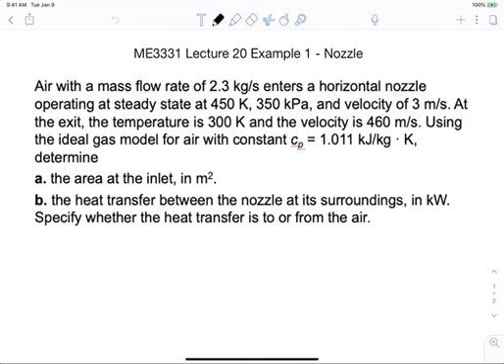The way I'm going to work this is I'll have the slides up like this, and I'll also have a tablet here where I can do examples as we've been doing before. So this should work out pretty well - I have this tablet where I can write the example problems, which you'll see. Okay, so that's the format that's going to happen.

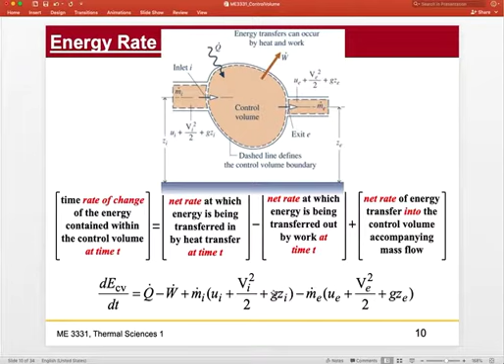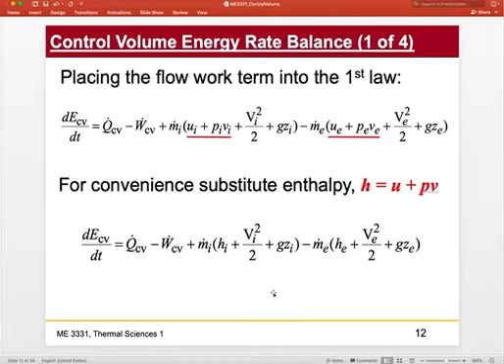So then what we did was develop the work, the flow work at the inlet and the outlet, and use this convenience factor called enthalpy. With that convenience factor, we were able to reduce the first law equation, the unsteady control volume version, into something pretty manageable, and we got this equation here, accounting for both the kinetic energy terms and the potential energy terms.

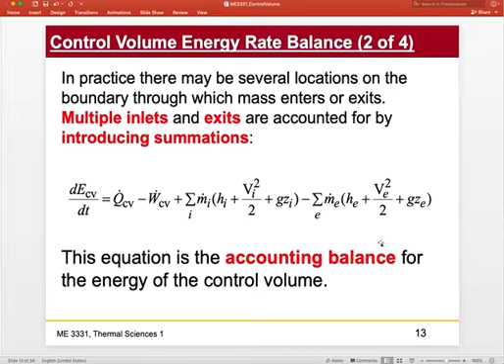Now if we look at the control volume energy rate balance for a steady state system, that is a system in which the control volume energy doesn't change with time. What we call steady state is most of what we deal with in thermodynamics. Most of the things we do in this class are going to be steady state control volume problems where dE_cv/dt equals 0.

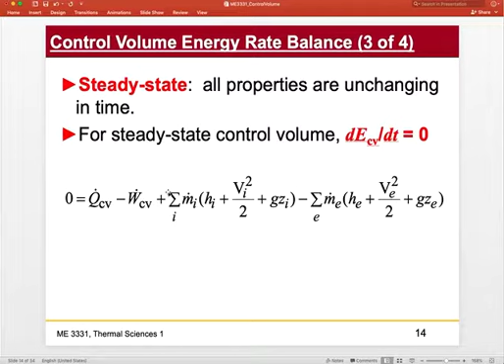In this case, we have the following equation that we've developed and did a couple example problems for. Then if we go to one inlet and one exit, we can get rid of the summations and go from there, reducing this to another form that you see here.

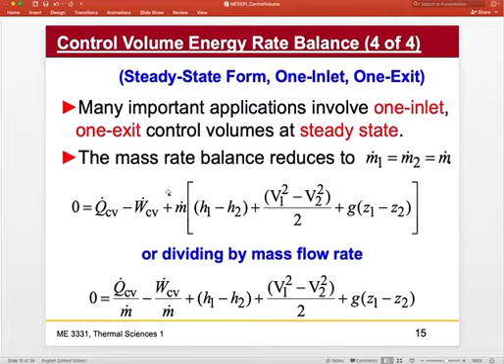So this is where we left off before the spring break, before this whole thing happened and before I had to start teaching this remotely. Hopefully we can get through this and really get to the end of this class in good shape.

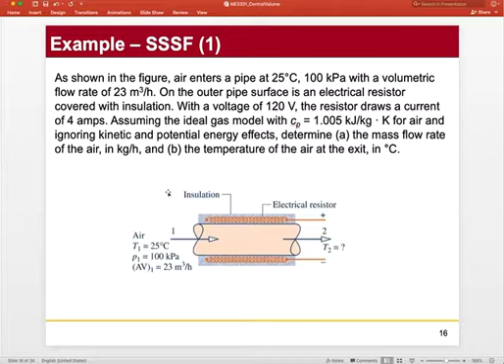Remember we did this one where we had air in a pipe. This was a really simple example. The solutions to this one are posted on Canvas, and hopefully you've looked at these and done some homework with regards to these. Also, we did this tube one here, with two-phase flow, and you did some homework problems that have to do with this.

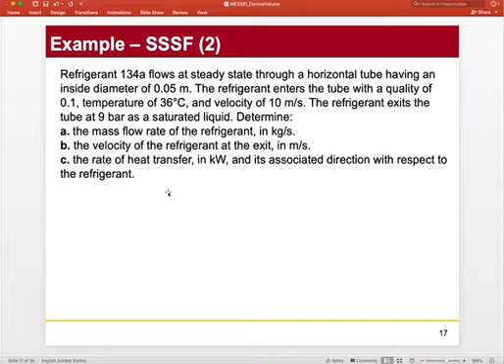That's good. Okay, so now let's move on. Now we're talking about different kinds of steady state systems that we can analyze using the control volume method. Here we have one of these types of systems, and I've mentioned this already before, and I'm going to go through it again, because you probably have forgotten or you weren't here on the Friday before the spring break.

So what we're talking about here is what's called a nozzle, which has a bigger area that goes down to a smaller area, or a diffuser, which happens the opposite way. A nozzle is a flow passage of varying cross-sectional area in which the velocity of the gas or liquid increases in the direction of flow, and the diffuser is the opposite, where the velocity of a gas or liquid decreases in the direction of flow.

So V2 is less than V1, P2 is greater than P1.

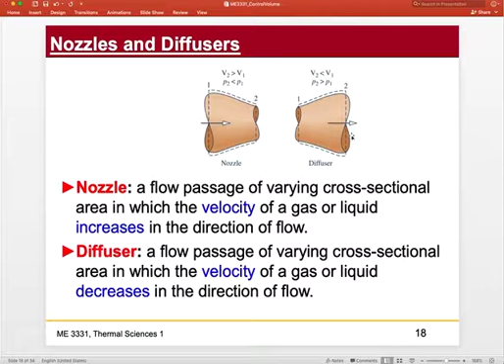Okay, so the nozzle is a pretty simple example. If we look at the nozzle and how to model it, we take the full first law equation, and we generally assume for a nozzle that the heat transfer is 0, so nozzles are generally adiabatic unless I tell you otherwise. We also assume the work is 0 because there's no shaft or propellers or anything like that. And the change in gravitational or potential energy is generally 0, so we don't worry about that. Of course, you're not really going to have a case where the elevation difference between the inlet and outlet of a nozzle or diffuser is significant.

So we're going to cancel that one out, but velocities we got to keep. If the change in potential energy from inlet to outlet is negligible, we assume that drops out, the Z1 minus Z2 drops out, and the heat transfer to the surroundings is negligible, so QCV drops out. You end up with the following equation: 0, meaning steady state, dECV/dt equals 0, equals h1 minus h2 plus the change in the square of velocities over 2, taking into account the kinetic energy effect.

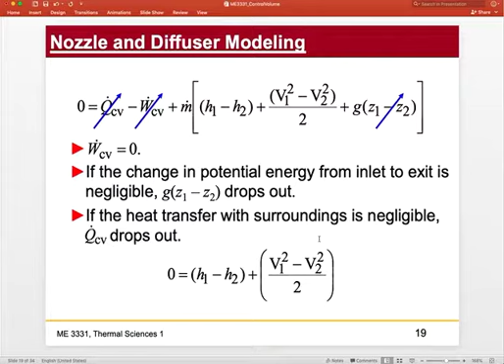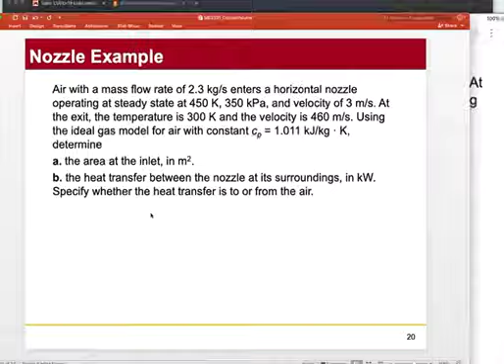So if you want to do an example, we can do a simple example of this kind of problem. Let's do this example together. I noticed everybody liked that my lectures had lots of examples, so I'm going to continue that in the online format, and I'm going to do that all via a tablet. I have a tablet here in front of me that has all this fancy stuff, and I'm still trying to figure out how to use it because I just bought it.

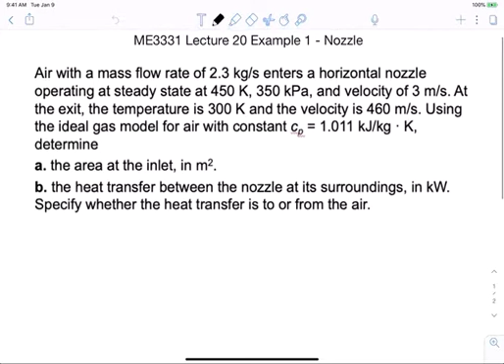Essentially what I've got here is this example problem. I'll be posting this as a PDF online on Canvas. Let's go through this example. Air with a mass flow rate of 2.3 kilograms per second enters a horizontal nozzle operating at steady state at 450 K, 350 kPa, and a velocity of 3 meters per second. So we have air, so we assume this is an ideal gas. At the exit, the temperature is 300 K and the velocity is 460 meters per second. Using the ideal gas model for air with Cp equals 1.011 kilojoules per kilogram K. Remember, we were going to use Cp dt equals delta H, and we can do that here since we say there's a constant Cp. So with this, we're going to try to figure out what's the area at the inlet in meters squared, and the heat transfer between the nozzle and its surroundings in kilowatts. So these are the things we have to find.

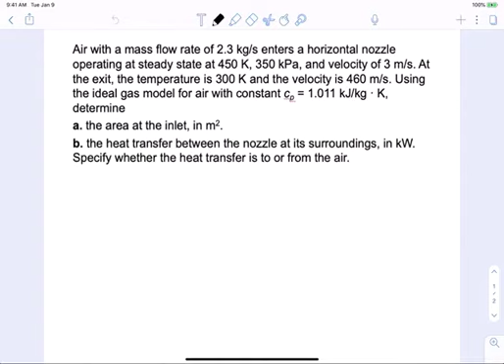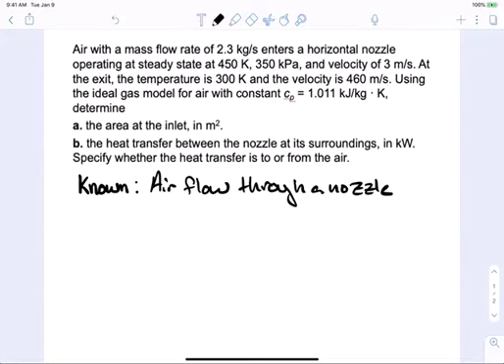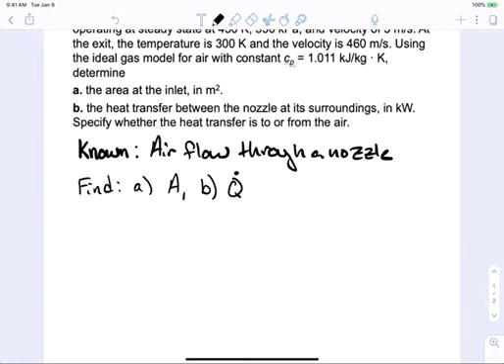As we usually do with these kinds of problems, we have to write down the known. I'll try to keep my handwriting neat here so it doesn't get messed up: airflow through a nozzle. Okay, that's what we know. What we have to find in this case is A, so A1, and B, the heat transfer between the nozzle and the surroundings. Remember how I said normally a nozzle is adiabatic? In this case, it's not, so we need the Q dot from the nozzle, from the control volume. That's what we're going to find here. Now that's the find, so now we have to draw a diagram. Let's make a diagram.

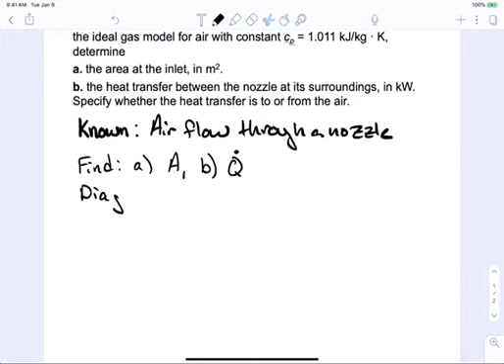So a diagram of our system looks like this. We're going to have a nozzle. Air with a mass flow rate of 2.3 enters a horizontal nozzle. The nozzle means the area is bigger and then it goes smaller. So we have a nozzle that looks like this, and then the area is smaller. It's not concentric, but that's okay.

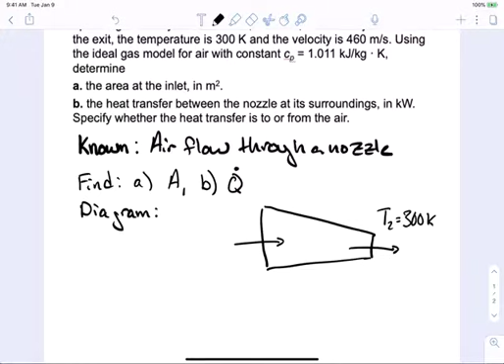I'm still learning how to write with this thing. So we have some flow rate coming out here, and some flow rate going in here. We have T2 equals 300. We have V2 equal to 460 meters per second. Okay, so that's pretty high velocity.

All right, so we're not adiabatic. We have to define our thermodynamic system, of course. We're going to make a dotted line around this thing. We have no work, but we definitely have a Q dot term coming out of this thing. We'll show Q dot as going in, so let me get rid of this arrow and put it in like that. You just assume Q dot is going in, and we'll find it to be negative in the problem. This is 2, this is 1, and we were given a bunch of stuff.

So T1 is equal to 450K. We're given P1 is equal to 350 kPa. We're given V1 equals 3 meters per second. And we're going to say CP is going to be constant at 1.011 kilojoules per kilogram K. Mass flow 1 is equal to 2.3 kilograms per second.

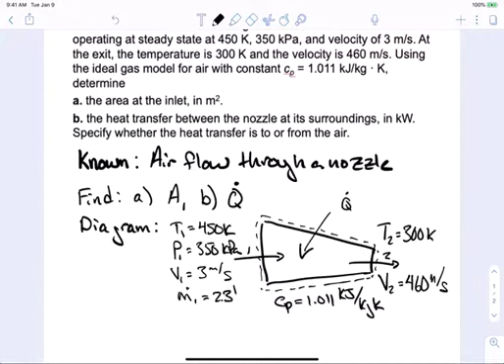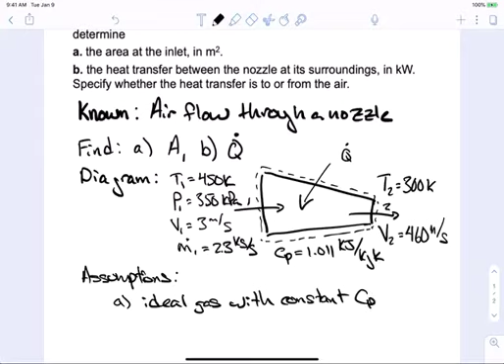Okay, so it's ideal gas, so let's make some assumptions here. Some assumptions we need to make for our problem are that we have ideal gas with constant specific heat. B, let's assume there's no work of the control volume, equals 0. There's no shaft work. It's not adiabatic, and essentially delta PE is equal to 0, so there's no potential energy change. And then of course we have to assume it's a steady state problem. Okay, so it's steady state.

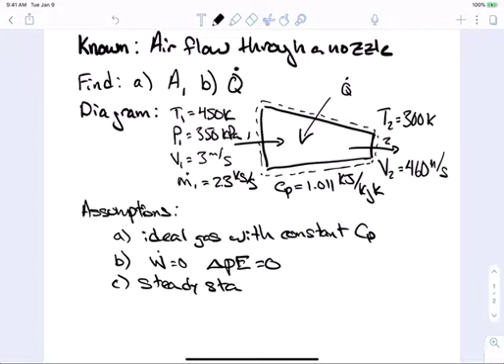Fine, all right, now let's go on with the analysis. So in the analysis, we're going to assume that m dot 1 equals m dot 2 equals m dot, because there's only one inlet and one outlet. So that's the first thing we have to assume here. And that m dot is equal to A1 V1 over the specific volume at 1. So that's something we have to also assume here.

And we can figure this out because we know what the specific volume at 1 essentially is from the ideal gas law: R T1 over P1. So by the ideal gas law, we can substitute this in and get what we need for A1. A1 is one of the things we needed to find. So A1 is equal to m dot R T1 over velocity 1 times P1. This is velocity. Okay, so this is going to be pretty straightforward to do.

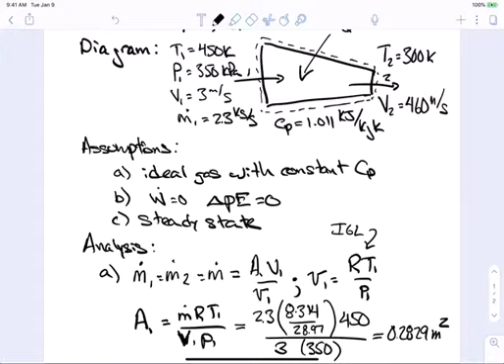So that's a pretty simple thing. We don't need to use the first law for that. Now for the second part of the problem, we need to use the first law. So let's do that on the next page. Example 1 continued.

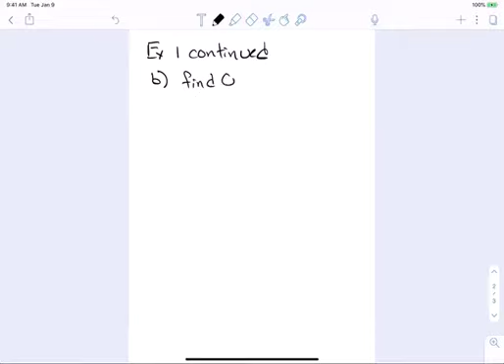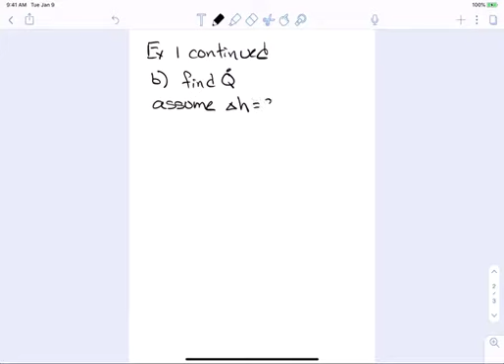Okay, so the next part is that we need to find Q dot. So here we assume that this delta H that we have is equal to CP delta T, because this is a constant. If I said that we don't have constant specific heats, then you wouldn't be able to do this, okay? But since we said this is a constant, that's cool.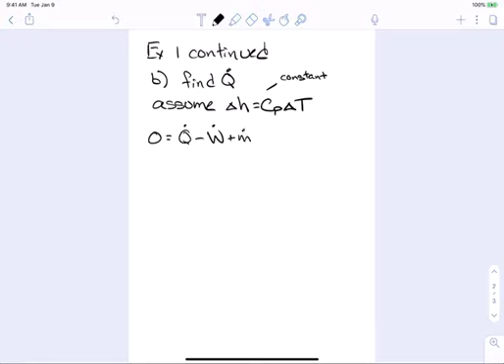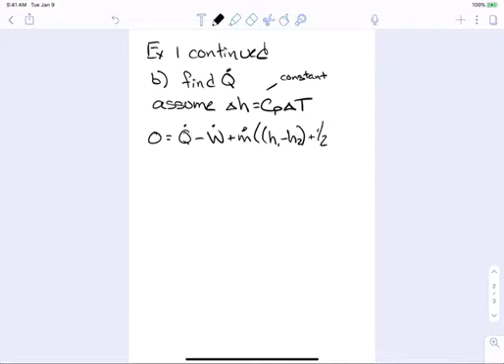So now let's go with here. So we have one inlet and one outlet, and now we can simplify this thing. So 0 is equal to Q minus W. We're going to just put all the terms in here just so we can cross them out for fun. M dot, H1 minus H2, plus 1/2, let's zoom up on this, V1 squared minus V2 squared.

And we're just going to neglect the gravitational term, so the gravity term is not here. No delta PE, because I ran out of space. Okay, so this simplifies now if we assume this is 0, because there's no shaft work, right?

So as we said before, this simplifies to Q dot equals M dot CP times T2 minus T1, because we just switched the signs. Remember how I put the Q on the other side of the equation, so the T2 and the T1 go to the opposite sign.

So now we have the velocity term, V2 squared minus V1 squared, over 2. There we go, that works pretty well.

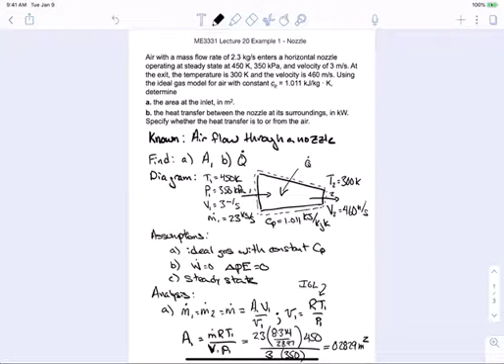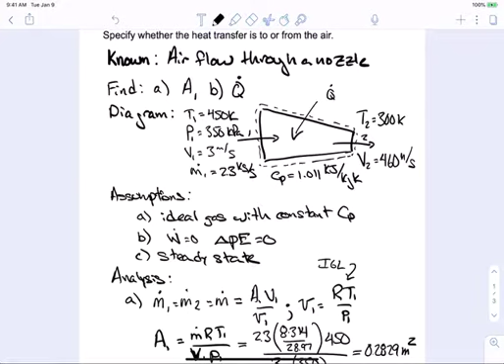Okay, so let's see, do we have everything we need? Let me go back to the problem here. It looks like we've got most everything we need, the inlet temperature, velocity. I think we have everything we need, so let's go to the next page and finish this off.

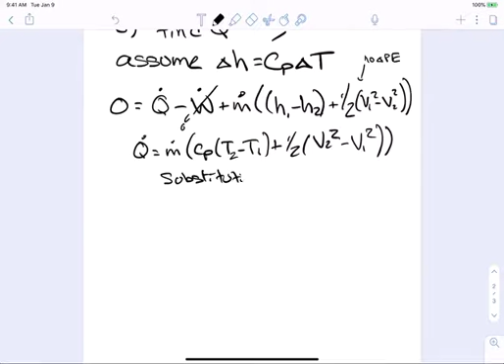So just substituting, we have Q dot equals 2.3 kilograms per second times something big here. We're going to have 1.011 for CP, times 300 minus 450, because remember the temperature went down, plus we're going to have 460 squared minus 3 squared over 2.

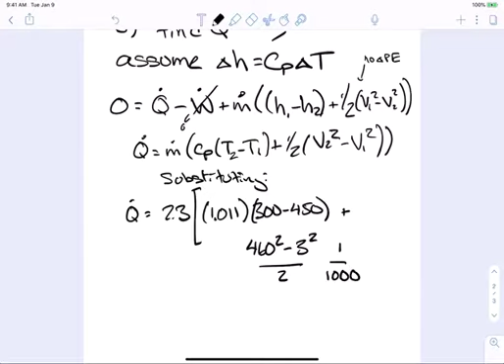And since we have velocities here, we're going to have to do a correction, right? This is meters per second, so we need kilojoules. So 1 over 1,000 for the kilojoules conversion, kilojoules per Newton meter, because this is meter squared per second squared, and we want to get that right. So essentially that's how this comes out.

So make sure if you have the velocity here, you need to divide by 1,000. I'm going to put this in parentheses because this is in meter squared per second squared, which converts into kilojoules per kilogram. So you need to use the factor of 1,000.

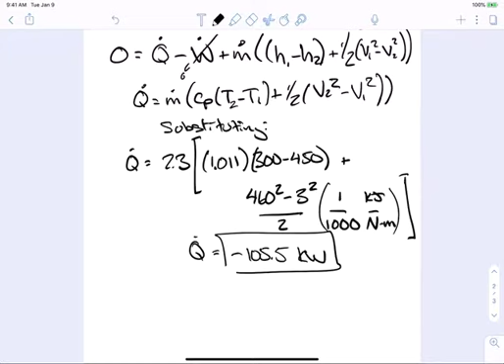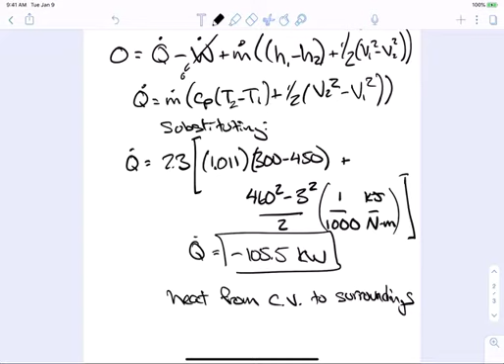So then we can close the big bracket here, and essentially we have Q dot equals negative 105.5 kilowatts, and this is the answer. So this is heat from the control volume to the surroundings. That's how we do this problem. We can see the heat is lost from this system because we have a minus sign in the Q dot. So that's the nozzle problem.

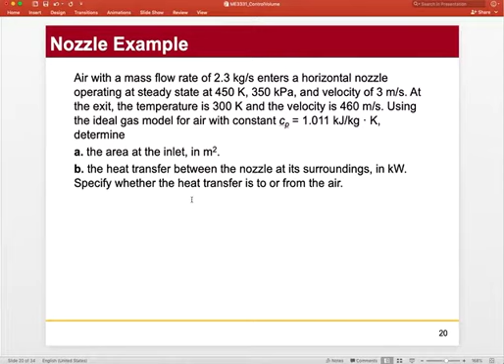It's pretty simple, right? I don't think this is really difficult to figure out. We just have to know how to apply the control volume form of the energy equation. Okay, so let's move on.

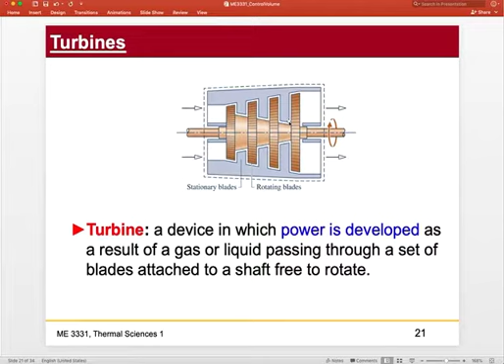So the next thing we need to figure out is turbines. Turbines are a special kind of device. Turbines and compressors are special devices where power is developed as a result of gas or liquid passing through blades. Here we have stage blades, from small blades to large blades. In this case we have an expander, we're expanding, we're making power.

In this case, we have turbine modeling where the change in kinetic energy is negligible. So what we're going to do is develop the first law for a turbine, and this is going to be the same for a compressor too. I remember doing this in class, so I'm going to do this again because some people weren't there for that lecture.

Now, if you notice, I'm at home, and there's somebody grinding wood chips outside my window. So that's just the way these lectures are going to go, I have no control over that. So hopefully you can hear me just fine.

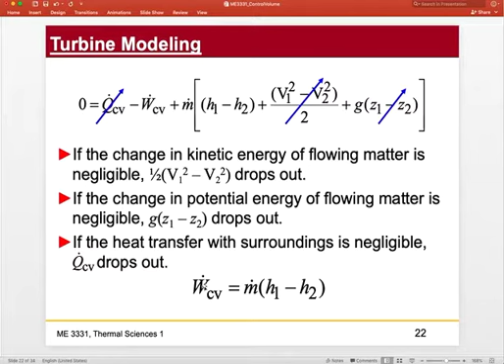So if this is an adiabatic turbine with heat transfer to the surroundings being negligible, we essentially get this very simple equation: W of the control volume, or for a turbine, equals m dot times H1 minus H2. That's the exact same as I said for a compressor, so we don't worry about that.

Okay, so compressors or pumps are the same kind of deal, in which devices work is done on the substance. As I said in lecture, there's a bunch—roots blowers and a bunch of other stuff—these are different kinds of compressors you might see. However, from a thermodynamic standpoint, from what we're going to be doing here, they're going to be exactly the same.

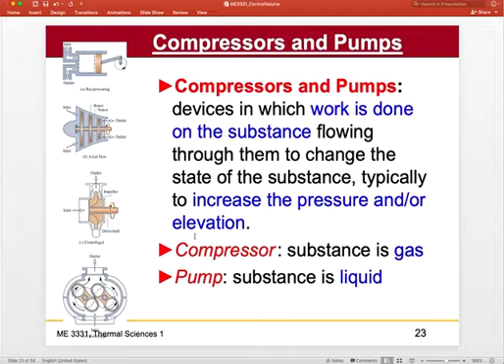So the change in kinetic energy—in this case the pump compressor runs into the same equation, ends up in the same equation: W dot CV equals M dot H1 minus H2.

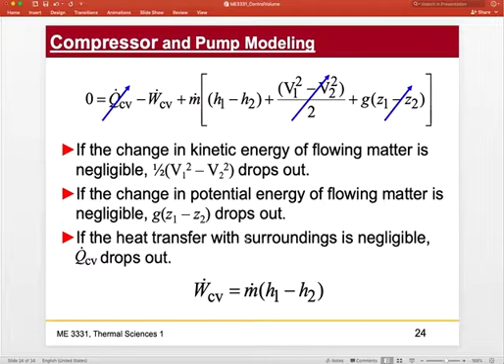Okay, so let's do another example. Let's do one more example here and see how this turns out for a compressor. This will be the final thing I'll do today, an example for the turbine. I'll be giving you some homework on turbines and compressors so you can practice these. Turbines, compressors, and pumps are the most common things you're going to find in thermodynamics, so it's good for us to do these examples.

Okay, so here we go. Here's what we're going to do—we're going to do this problem, and I'll put it up on my tablet again. Steam enters a well-insulated turbine operating at steady state, at 4 megapascals, with specific enthalpy given.

Actually, I seem to remember doing this problem in class, but I'm going to do it here. I may not have posted this one online, but I seem to remember doing it in class, so I'm going to do it again. So we have a very simple problem here where we're given the enthalpies—we don't have to look them up in the table, and we can kind of move on.

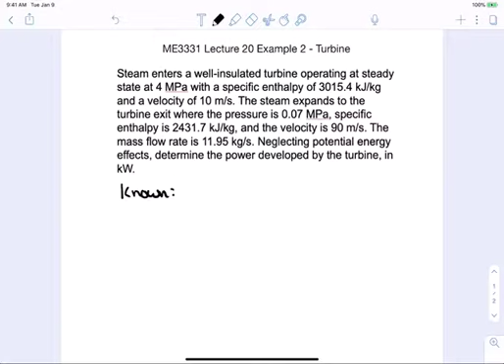So let's see here, let's do this one. So what we have known—we know that we have a steady state turbine.

Okay, and then essentially we need to find the power developed by the turbine, so that's W dot. Okay, finding W dot. Now we're going to make our assumptions.

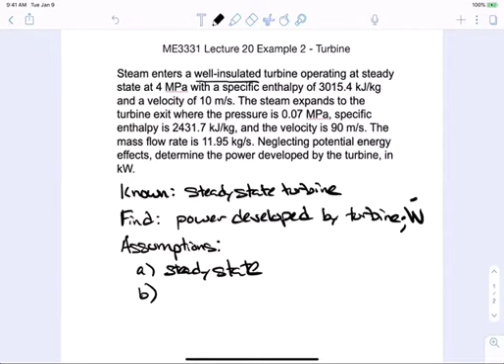Actually, we can make our assumptions first—doesn't matter which way you do this. So if we make our assumptions first, we're going to assume that we have steam, steady state, and well insulated. Well insulated generally means that we have an adiabatic turbine.

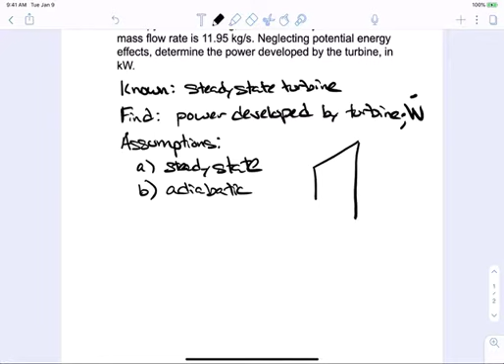Adiabatic turbine, properties given. So let's just draw it. Generally a turbine you draw like this, and then you have condition 1, condition 2. Then you have some power coming out, and you've got to make your control volume boundary—it's always good to do, and sometimes good to label it control volume.

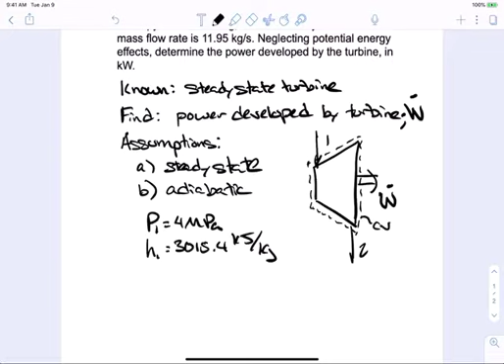So coming in, you have P1 equals 4 megapascals. H1, you don't have to look in the steam tables because it's given to us: 3015.4 kilojoules per kilogram. And V1 equals 10 meters per second. We also have M dot given to us as 11.95 kilograms per second.

Okay, kilograms per second. And then we also have the condition of 2, so P2 equals 0.07 megapascals, and H2 is equal to 2431.7 kilojoules per kilogram. What else? We have V2 equals 90 meters per second.

Okay, so there's our diagram and our assumptions. This means that Q dot equals 0. Okay, so now let's just reduce the equation. So, analysis.

Analysis looks like this. Essentially, we have 0 equals Q dot minus W dot plus mass flow rate times H1 minus H2 plus V1 squared minus V2 squared over 2, neglecting potential energy, no delta PE, because I ran out of room. Okay, so now we're just going to get our final rearrangement of the equation, and it equals M dot times H1 minus H2 plus V1 squared minus V2 squared over 2.

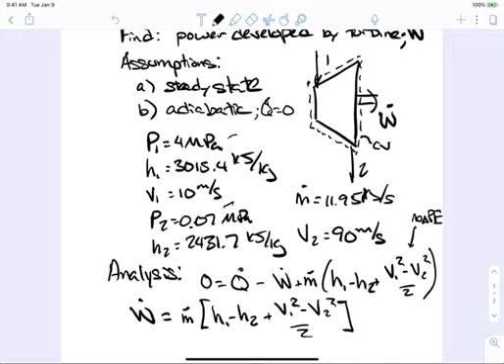So we're going to do the final solution here. Solution. We're going to get that work is equal to 11.95 times 3015.4. This is the mass flow, right, M dot.

Minus 243. Oops, let's erase some of these. This is starting to look messy. Okay, so let's do this again. So we have 11.95 times 3015.4 minus...

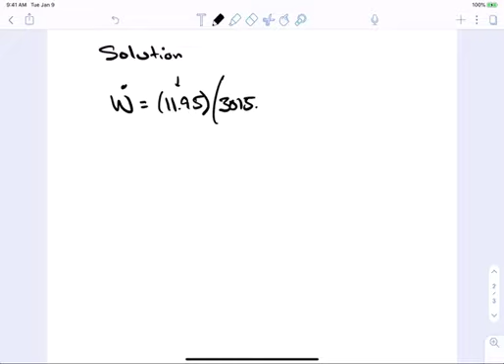2431.7, and we have to then do the correction for velocity. So this is the kinetic energy term divided by 2, and then we're going to have a 1 over 1,000 again, remember that, like we did just before. And essentially what we've got here is the very same kind of equation that we set up for the nozzle. It's very, very similar, right?

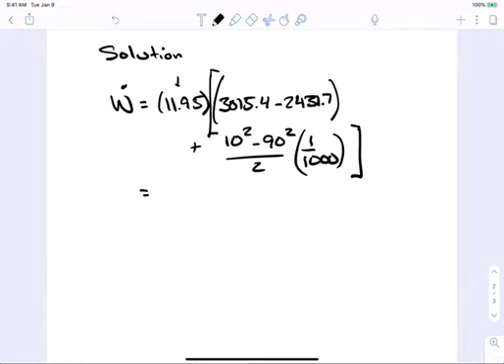So then we're going to end up, if we just finish the deal, with 6927 kilowatts. So this is positive, so it's work out of the turbine. Okay, so that's how we do it. That's how we do that thing.

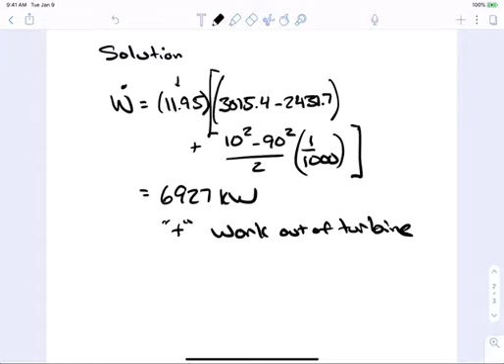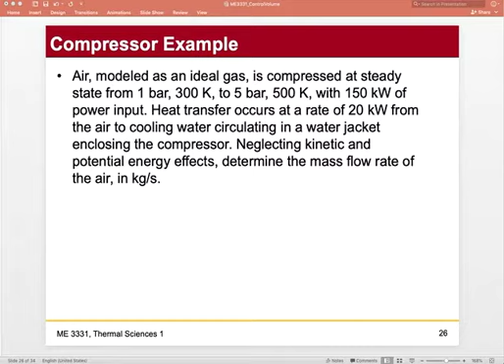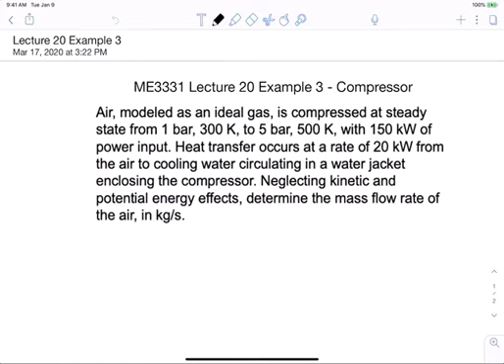All right, so now let's see, we're at 35 minutes here. So I'm going to keep going a little bit and see what else we have to cover. As I said, I may have done that one before. We can also do this compressor example, though I may save that for the next lecture. Oh, maybe I'll just do it now. I mean, we can just do it now, right? So let's just do one more example here, and I think this is also a pretty straightforward one to do. So I'll post this one as well. Let's just do this example, and then I can quit after this one. How's that? All right, so let's see now. Let's see if I can move to the next example problem here. So this one is just a compressor. So this is like the opposite of the turbine, right? So it's just the opposite of the turbine.

So we can see that we have air modeled as an ideal gas, compressed at steady state from 1 bar, 300K, to 5 bar, 500K, with power input. Right, so we have power input. Heat transfer occurs at a rate of 20 kilowatts from the air to the cooling water. Oh, so we actually have not an adiabatic compressor here. Neglecting the kinetic and potential energy effects, determine the mass flow rate of the air.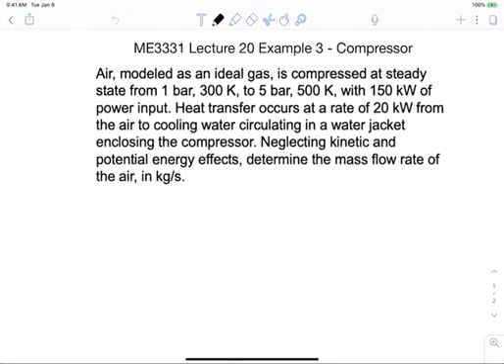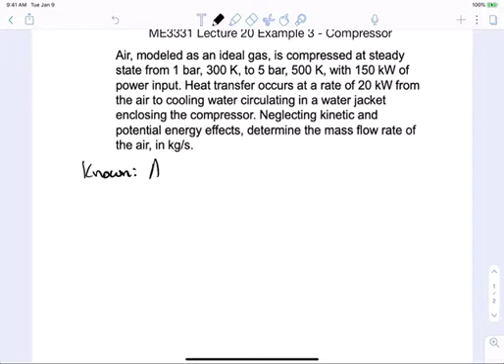All right, so let's do this quickly here. I'm going to go even smaller here and get more material on the page. So what we have known is that we have air through a compressor. Okay, so that's known. We have data provided at the inlet and the outlet, and what we have to find here is the m dot. Okay, pretty straightforward. So let's do our assumptions.

So our assumptions here are, A, that we have ideal gas. Are we going to assume constant specific heats? I don't think so, I don't think we're given constant specific heats. We're going to have to look these up, we might have to look things up. We have to use the tables because it doesn't say constant specific heat. So if it doesn't say constant specific heat, we're not going to assume it. Okay.

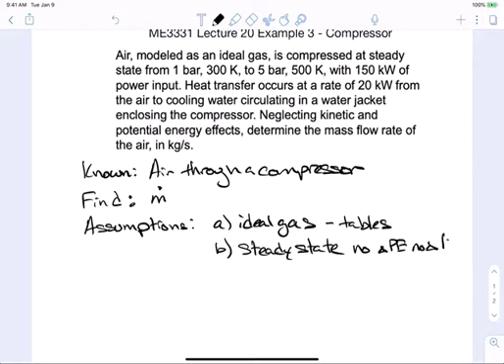We're going to assume that's steady state, and we're going to neglect delta PE and delta KE. Essentially, we're just going to write this analysis up pretty easily. We may not have to write out the entire first law equation because we have a good idea.

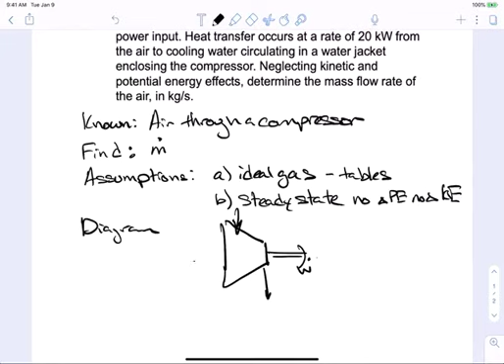So let's make our diagram. The compressor is drawn kind of opposite of a turbine. It looks like this, and you have stuff coming in and getting compressed, going to the small side. You have some work coming off of this thing, and in this case we have some heat. I'm going to draw this as Q dot going in, because that's the way we always draw heat.

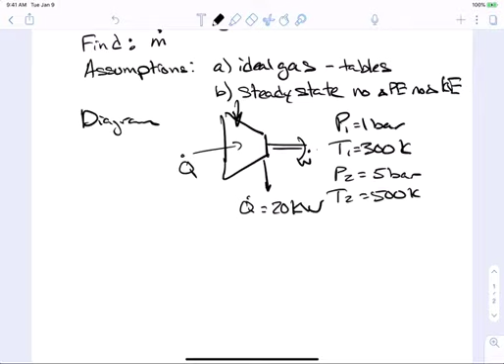Let's see, we have P1 equals 1 bar, and T1 equals 300K. And we have P2 equals 5 bar, and T2 equals 500K. And then we have Q from the control volume, is 20 kilowatts. I think that's all we're given, right? Yeah, that looks like it.

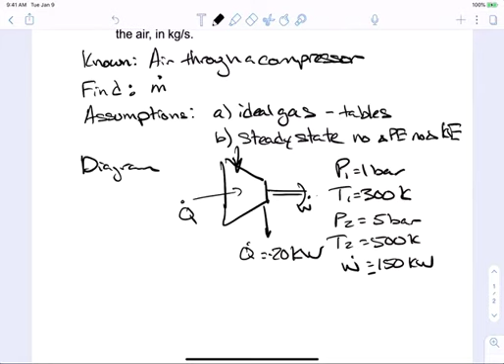Oh, and 150 kilowatts. We have W dot equals 150 kilowatts. Now, this is work in, right? So this is negative, and I believe this is transferred from the air to the cooling water, so this means it's out of the control volume, so this actually is negative as well. Let's see how this works out. Let's clean this up a little bit here. I think we're good here.

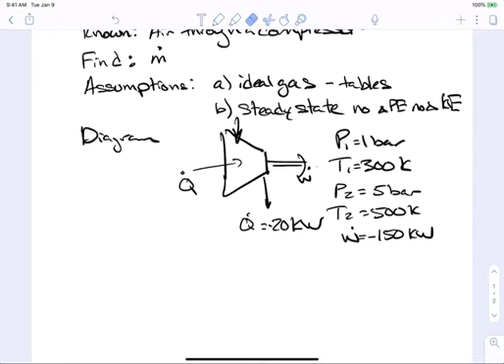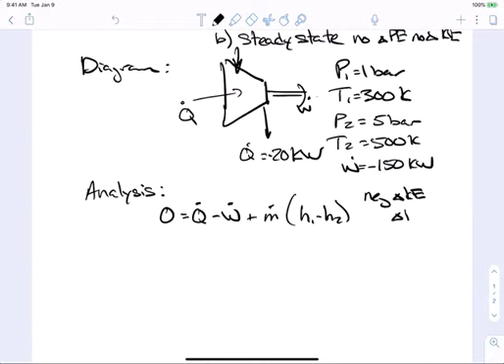Okay, so now let's do analysis. Essentially, we're going to say 0 equals Q dot minus W dot plus m dot times H1 minus H2, and we're going to neglect delta KE and delta PE, and we're not even going to write them in the equation, because we're advanced now, and we're not going to even do it. So then we're essentially going to get to the equation for m dot.

Solving for m dot, we end up getting m dot equals Q dot minus W dot over h2 minus h1. That then we have all we need, but the problem is that here we have to look this up in the table, h2 and h1. I believe it's in table A22. You can look those up, because I'm running low on time here, and I want to keep this lecture somewhat short. You may or may not need to interpolate, probably not, but I think we can assume you guys know how to do that.

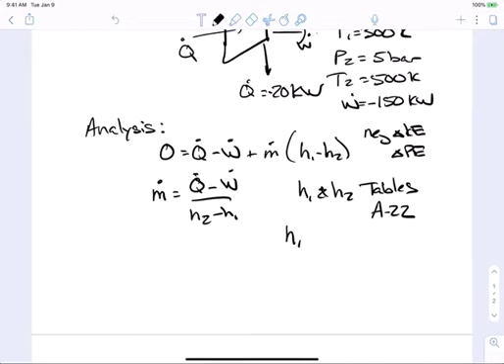So H1 I have written down here as about 300 kilojoules per kilogram, and H2 is equal to 503.02 kilojoules per kilogram. Really, forget about the 0.02, this is ridiculous, we don't need it. Then essentially what we can do is solve for it. So m dot is equal to negative 20, because remember we said that's negative, minus a negative 150, divided by 503 minus 300, and for that we end up getting a solution of 0.64 kilograms per second.

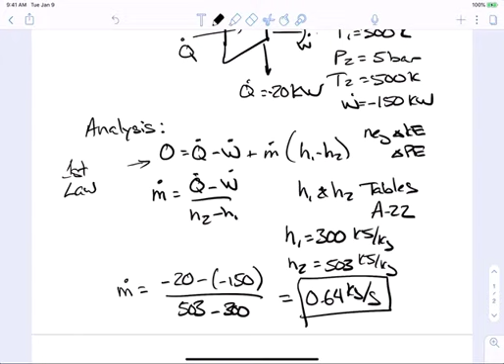So we end up using the first law here, first law as your analysis tool. That should give you a pretty good handle on using the first law for control volumes.

Let me go back to my slides. Next time we're going to cover heat exchangers in our lecture. Your homework due Friday will have to do with turbines and compressors, and your example and discussion will probably also have to do with those things. I'm going to move on to heat exchangers next time, and after that we're probably finishing up with control volumes and moving on to a new subject.